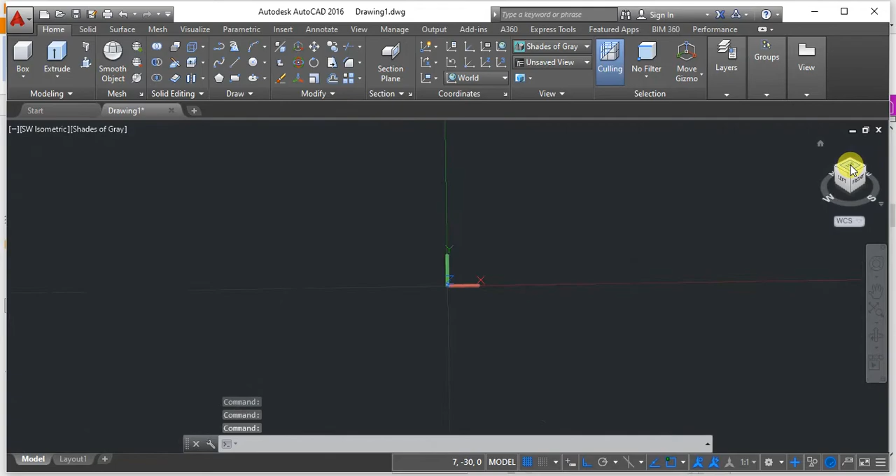Now we are going to discuss this. To start, switch to the top view. In top view, you have to first consider two circles with diameters of 43 and 30, and the center to center distance would be 75. So first draw a line of vertical length 75.

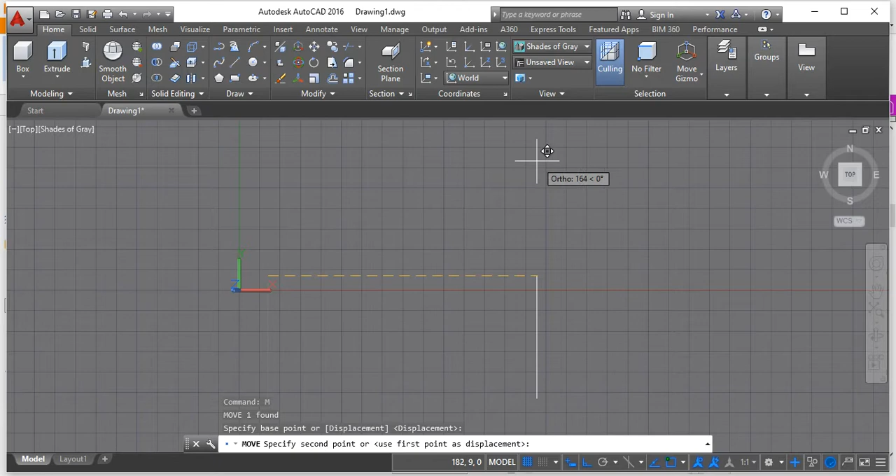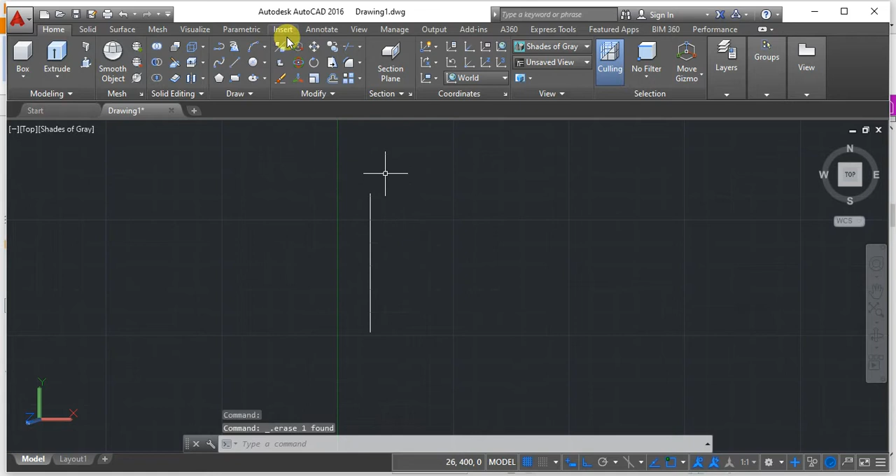Then you can start making the circles. Select diameter mode, using center and diameter. The very first diameter is 43, then the second diameter would be 30. Repeat the same thing on the other end also. Just have a look whether it is diameter or radius.

Repeat the same thing on this end also, like 43 here. Be careful while selecting the diameter, because if you don't select a proper diameter, it would give odd results.

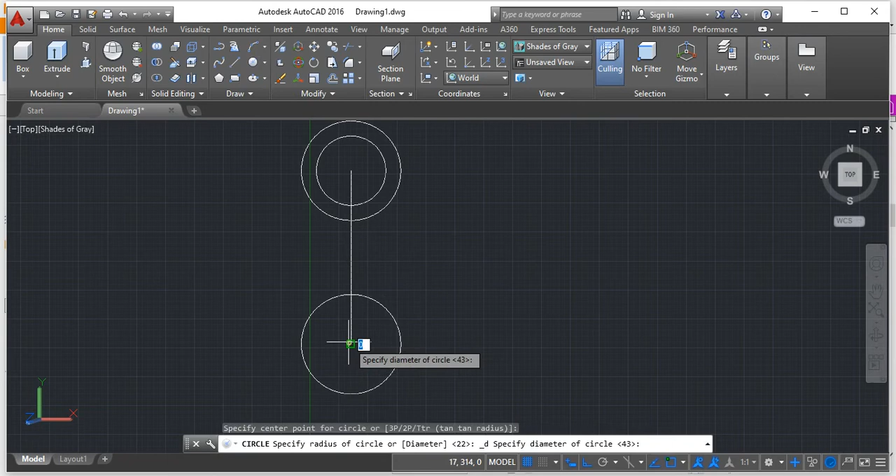30 here. So we can start the very first line, which is 50, from somewhere. Start from one end of the circle vertically, which is 50 here. Then repeat this process on the counterpart. It would be 75 because of the center to center distance we considered.

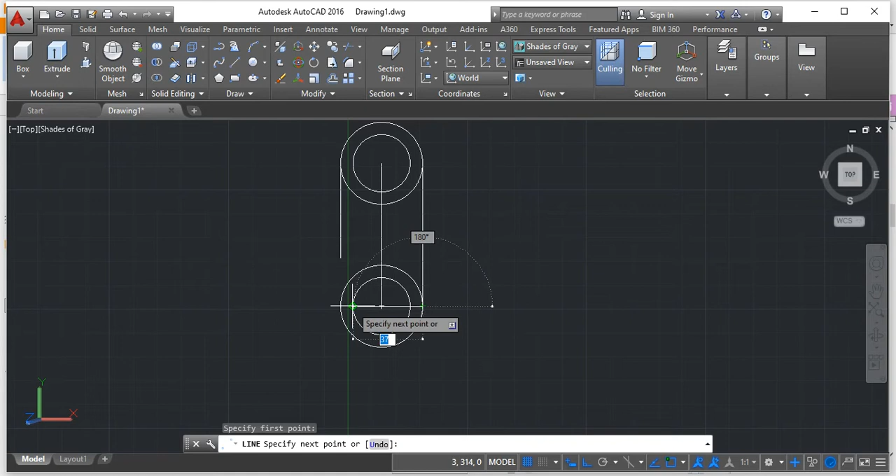Now the second thing is how to start making the converging part. For the converging part, straight away take this end to join this particular circle, since from this circle only we have to start converging.

But the problem is, while converging, it is not possible directly, so we have to remove the excess part. To do that, extend it till the end, then draw a vertical line from the interior circle in order to overlap the exterior circle.

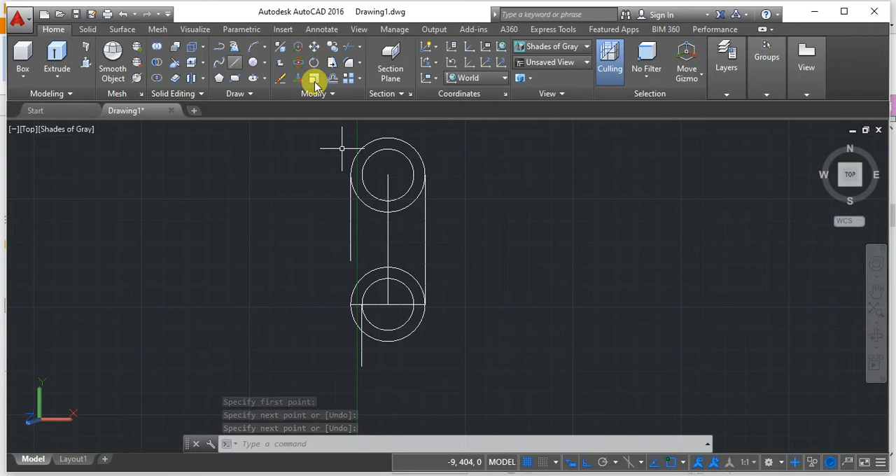Now the actual trimming part will start. Later we'll just trim properly, but initially, for your understanding, I'm trimming the excessive parts. Give a Control A, use the trim command, then trim off the interior part of this, and the second part of this circle.

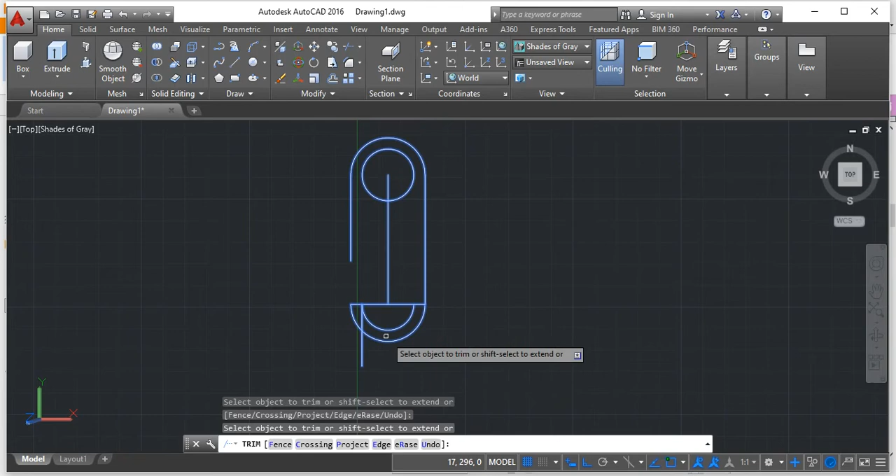This circle would be trimmed off as well. This excessive line and this excessive component should also be trimmed off. Give an enter, and later you can delete other components manually.

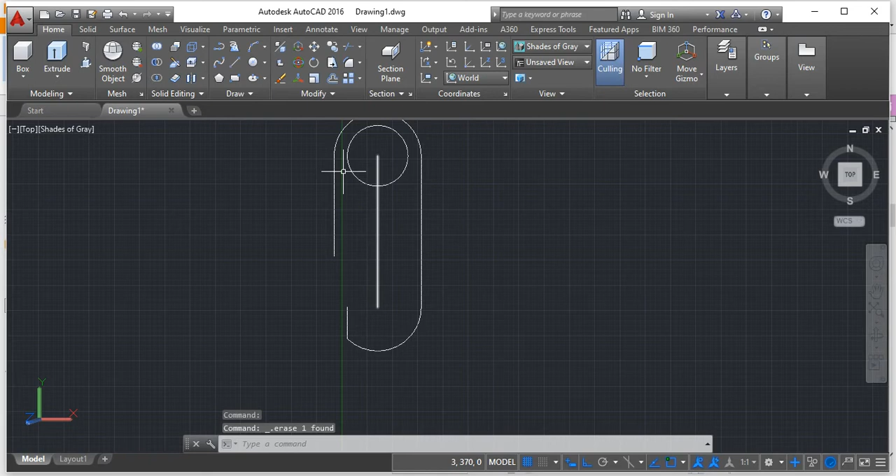Extend this line in order to meet the interior component, then repeat the same thing for the exterior component, which in this case I am taking as 50, equivalent to the other component.

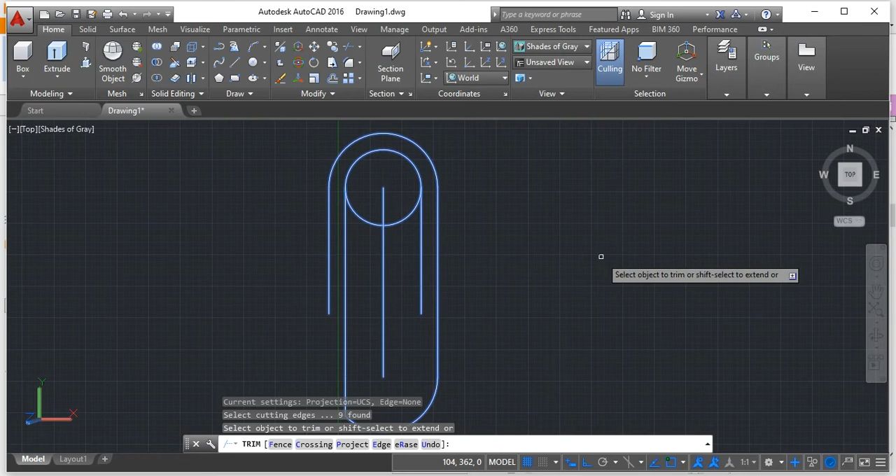Then this interior circle has to be trimmed off. Control A, then trim off the interior circle component, give an enter, and you can delete this line.

Then use the join command. Select the whole component or individual components, give an enter, and now it should be a single entity. If not, somewhere you are missing some components, so use the join command again and select individually so everything joins properly.

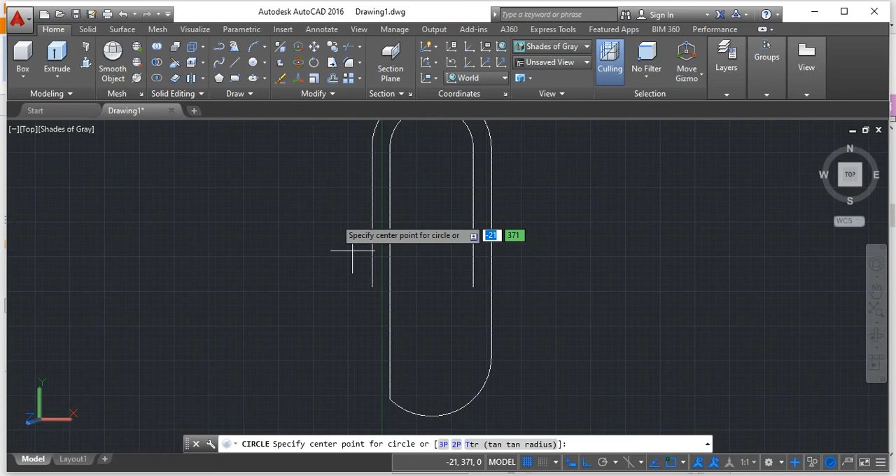Once that's done, at one end select a circle using the center and radius method. I'm selecting this end so it can be swept. The distance you consider creates the overlap, so I'm selecting 2. In order to avoid overlap, you have to reduce the circle diameter.

After this, use the sweep command, then select the first component which has to be swept through the path. That's it, the figure is done.

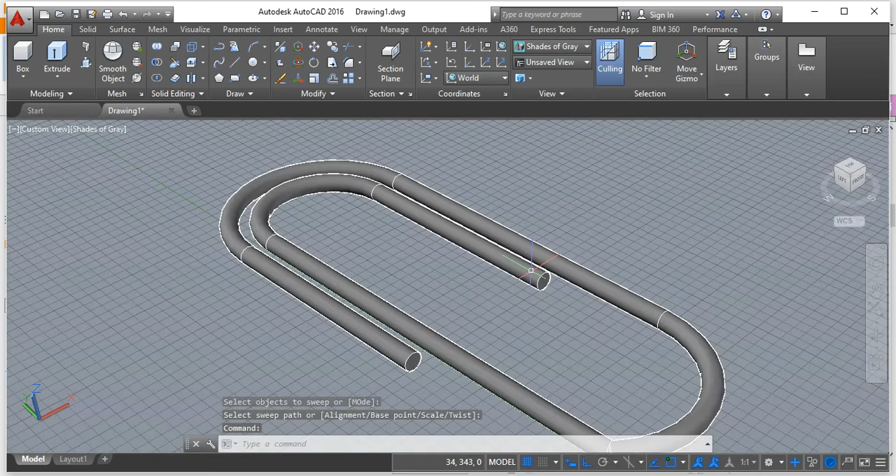The trickiest part is right here at this level. So you can use base from model space, then select this layout, giving a layout for question number 2b, then the front view, ensuring the top view is actually placed properly.

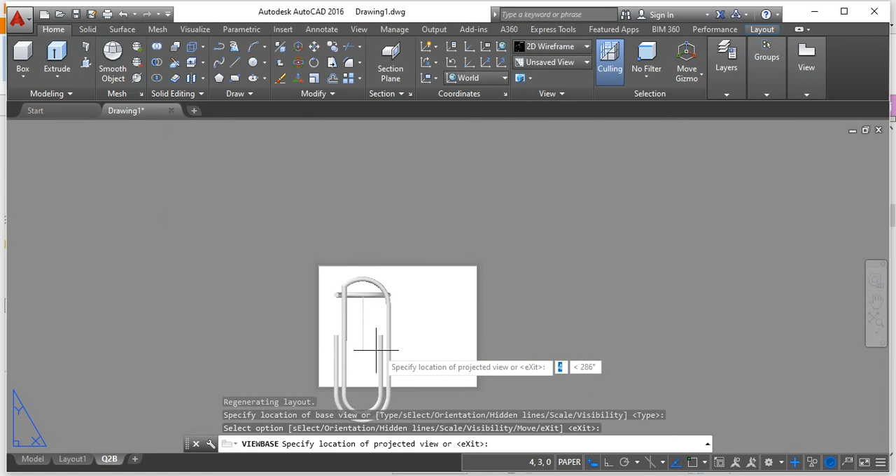Here I couldn't make it properly, so you have to make it in a proper way. Thank you, thanks for watching.